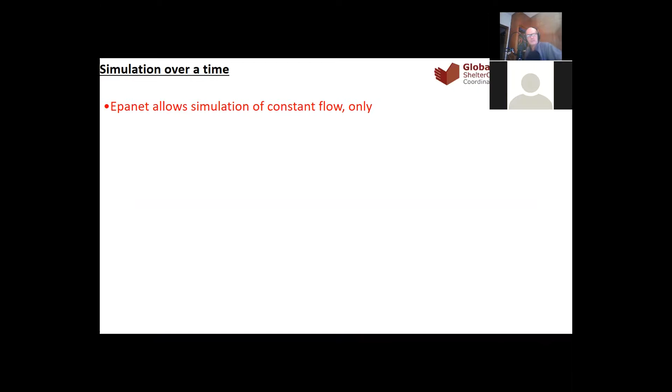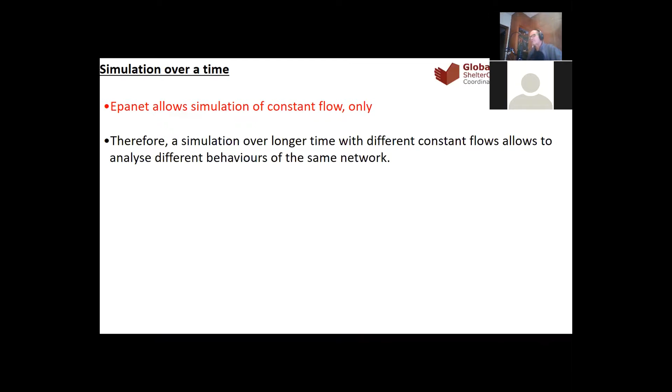Like I told you last week, Epanet allows only simulation of constant flow. That's why we make several different constant flows and we put them together. And these several different constant flows are linked to the time pattern. And it looks like that.

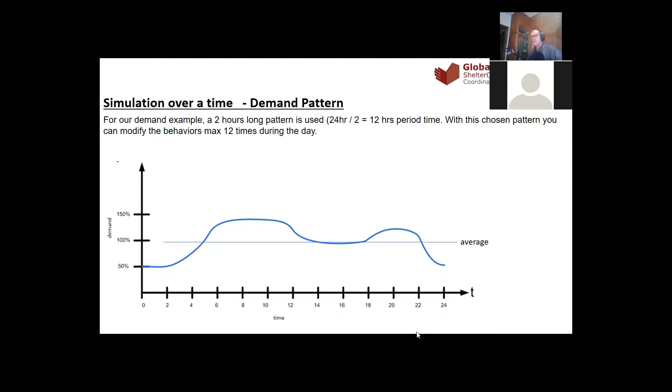Important for the demand pattern for the water consumption is that the average of the time pattern is 100%. So if we say our people use, let's say, 100 liters per day, and we know that they are consuming these 100 liters per day over one day. So a little bit, a lot in the morning, maybe a lot in the afternoon, and nothing at night or few at night. But at the very end, they use 100 liters. That's why the average of the time pattern must be 100% or 1.

So how it works, you have to open the Epanet file that we made last week, the simple analysis. The simple analysis was just in order to design the network. We ran it, it was working, and the idea is to be sure that we didn't make big mistakes like maybe forgetting pipes or writing bad elevations, but it was not a realistic simulation. Okay, now we open the Epanet file of last week, and we have to start to work on the options. We have to tell the computer that this time we do a simulation over time.

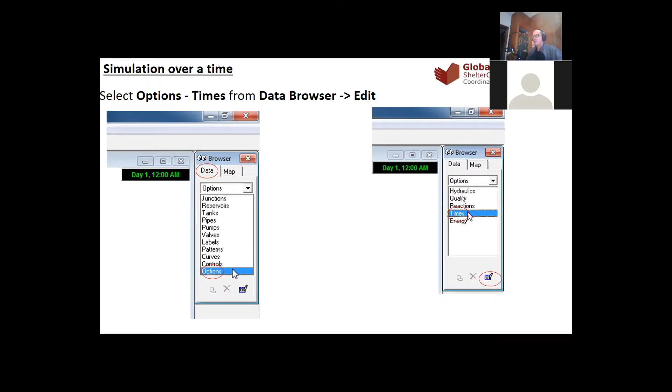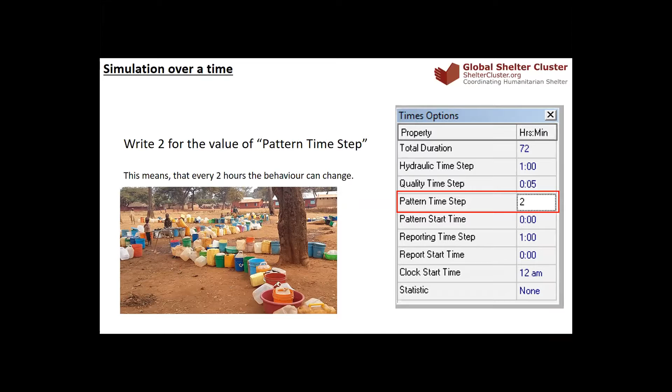For this purpose, we have to go to the browser. Under data, you go to options and you click on times, like you see here. You have this time option. You have pattern time step. Here, you have to put one number between 1 and I think 12. And this is actually the time that you consider for one change of pattern. If you write 1, it means that every hour you have to give a different pattern. If you write 2, like in this case, it means that every 2 hours you change the pattern. If you write 6, every 6 hours, and so on.

And then above, total duration, you have to give the hours for which you want to do the simulation. If you do 24 hours, it's just one day. It's better to do at least 2 days. The reason is that if you do only 1 day, you start with, let's say, a half full reservoir. Maybe you end the day with an empty reservoir, but in the morning, you start again with the half full reservoir. So it doesn't really give you a realistic simulation.

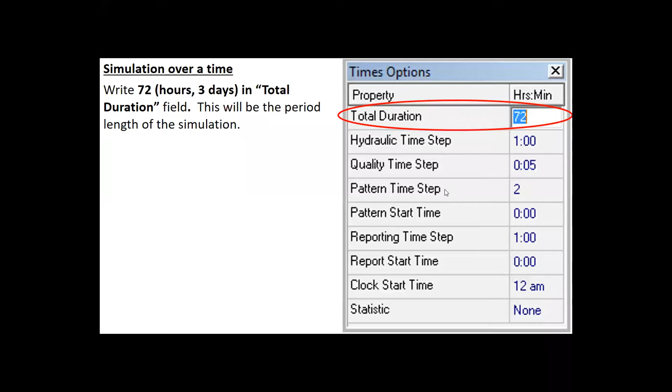That's why I like to work with 3 days at least, but you can work with 4 days. And then you can really see how the reservoir, how the system behaves over 3 days. So you use the water during 1 day, and the following morning, you continue with the situation of the previous day. That's why it's good to give more time. Then you can also give the time when you start the simulation, but it's not important. These 2 parameters, pattern time step and total duration, are the most important ones.

And then again, you have to give the pattern. In this case, like I was telling you, we have 2 types of pattern: the pattern for consumption, the demand pattern, and for the pumping time. So you go to the browser on the right, then we will see it in the exercise.

Then you choose under data a pattern, and here you will have this image here. You can see below here, you have 2 hours time pattern, because before in the option we have given number 2, and here you have the name of the pattern. We start with pattern number 1. You can put a description, for example, pattern for demand.

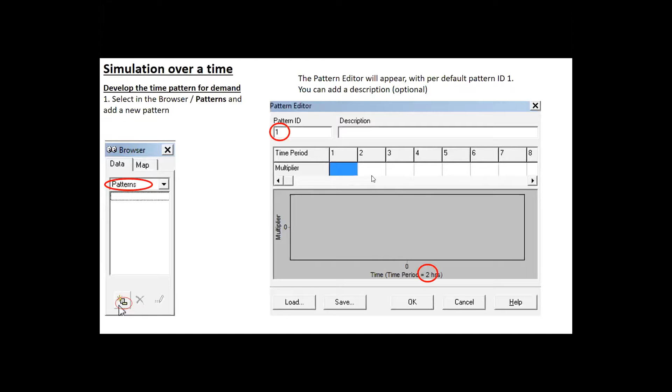You can put 0.6. Important is that, like I was telling before, the average must be 1. It means they are consuming 100 liters per day, for example, over 1 day. And this is very important. If you have a higher average, it means even if you know that the daily demand is 100 liters, but you have an average of 1.5, the system will consider 150 liters. So very important you put 1 here.

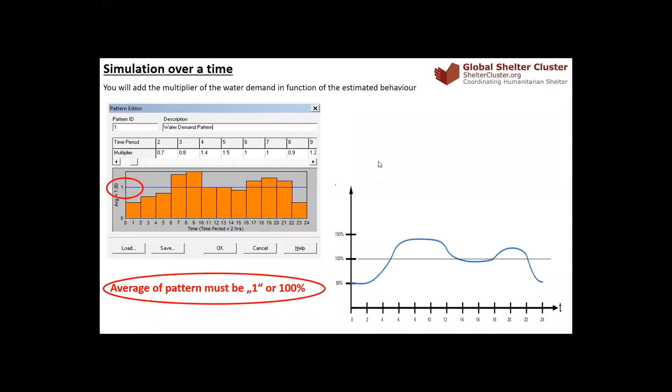You can as well save this demand for further use. And you give just the number up to 12 hours, 12 numbers, so that you will have the consumption over the 24 hours. If you would have put a time pattern of 1 hour, you should put 24 numbers here, not only 12. I think it's clear. We will see later how it works in reality. Let me put again this one.

Okay, now the issue is that you have to link each junction to the time pattern. We have some junctions with the demand, and those junctions need to be linked to the time pattern number 1. So what you do, you go on the junction, you click twice on the junction, and then you will receive these tabs here. And here under demand pattern, you have to put 1, which is actually the name of the pattern that you have just created. And this for all the junctions. You can do it automatically with bulk editing.

I just switch very quick on Epanet to show how it works. Here, you have Epanet now. You just go to edit, select all, and then you go to edit, group edit, and then you choose the junction, replace the demand pattern with 1. Doing like that, if you have many junctions, you give automatically to all the junctions the pattern 1. And of course, you can have a different pattern for different junctions. In this case, we have only one pattern because we don't have industry, but you could have a situation where you have different patterns.

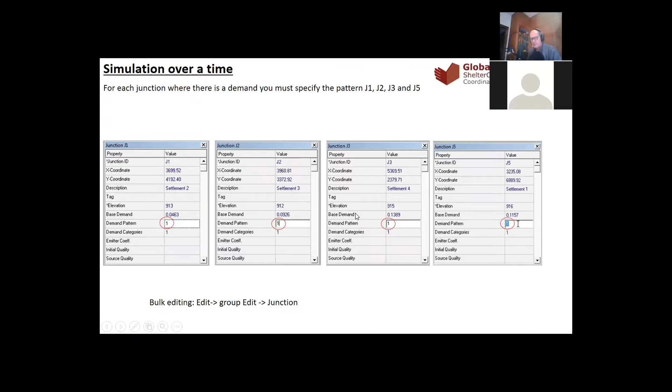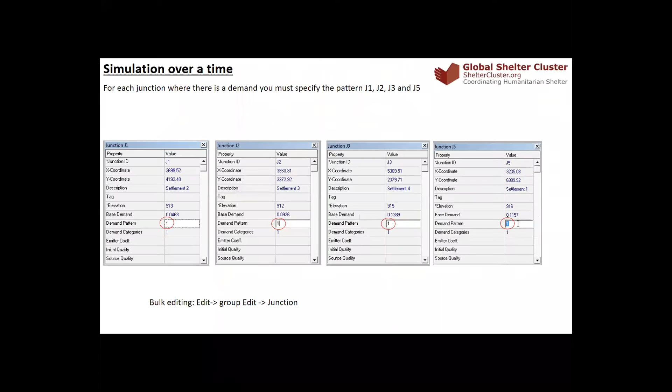Going back to my presentation. Okay. Okay, sorry, again to Epanet. Here now, if you check, let's say the junction, you will see you have demand pattern number 1. If I check junction 4, demand pattern number 1. I think it's clear. Okay, you do that for all the junctions.

And then you need to develop a second pattern, which is the pumping time. You have a type of pump that you probably have already identified. You know how many liters this pump can pump over 1 hour. You know how many liters of water you need for 1 day, and then you know how many hours the pump needs to run. The calculation is very easy. Knowing how much the pump can pump, you just have to calculate how many hours. But the idea is now to know when the pump should work.

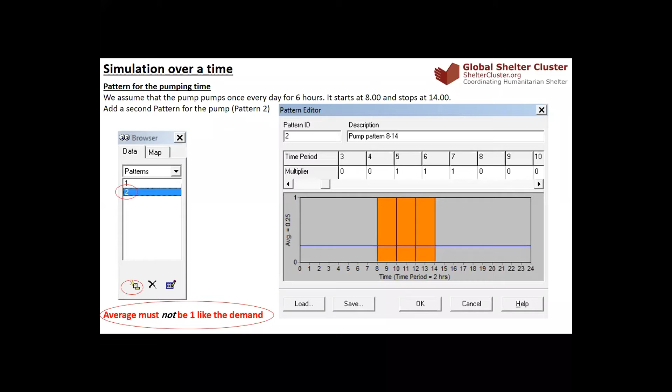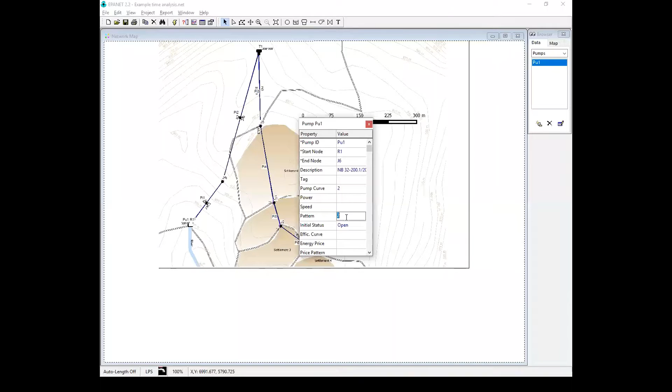Again here, now you have to link the pattern of the pump to the pump. Going back to my Epanet, I have the pump junction. I go to the pump. I click twice on my pump, and I see here pattern number 2. And this is very important. Otherwise, Epanet will not be able to link the pump to the pump pattern. Okay. Going back to my presentation.

Yes, in case you have a solar pump, the pattern is defined by the sun and by your pump. And you have to try to recreate this, let's call it natural pattern. And in this case, you have to take into account several parameters. The solar pump works, of course, with the sun, and you know there is a big difference in the solar intensity during the seasons, the summertime and the winter time.

So you need at least to do 2 patterns, one which reflects the situation during the summertime. This is because you have more water during the summertime, more pumping intensity, and you need to check your system in terms of size of piping. So with a lot of water, how will my reservoir react? How will the pipes react? How will be the speed in the pipes?

On the other hand, you also have to check the situation with the worst solarization, the worst case in the winter time, when you have little sun, because here you have to check if the pump is going to deliver enough water for the population, if the demand is going to be covered for this population. That's why it's good to have 2 types of pattern, summer situation and winter situation.

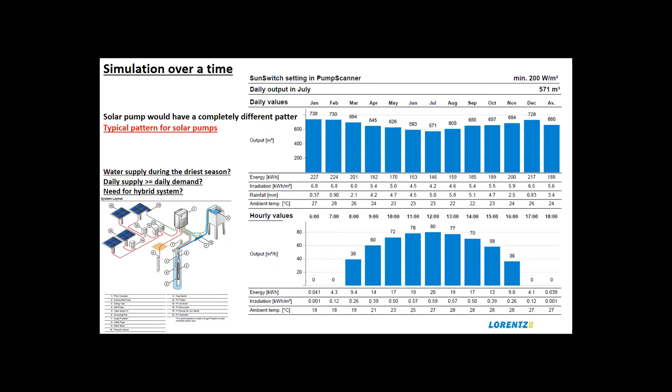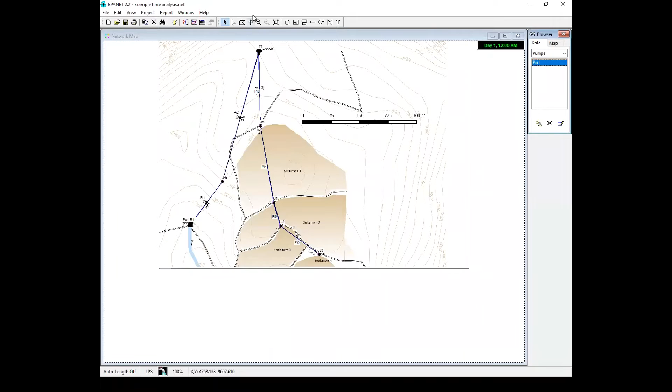First I check the situation in my reservoir. I click on the reservoir and I go to this one. Here I have graph selection. I have T1 and I choose pressure as a parameter. And now I see how the water behaves in my reservoir. You see, I start to pump in the morning at 8 o'clock for 6 hours, which is fine. And then there is a big demand and it's quickly dropping down and there is not enough water. That's why I have a problem here. And then it starts again, and like that.

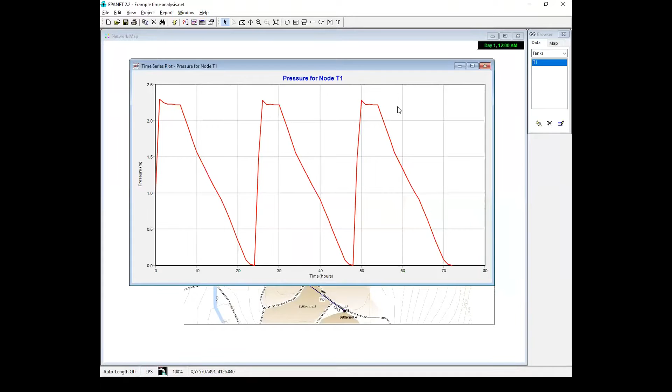But you see, somehow I have a mistake here and I have to change my parameter. What can I do? How can I improve or correct my network? I can, for example, change the pump, have a bigger pump. I can, for example, increase the size of my reservoir, but in this case it wouldn't make any change because you see the reservoir never really gets full. But what I can do is change the pumping time of my reservoir. Let's change the pumping time.

I go here, source, pump, and I check what type of pattern. Pump was pattern 2. Okay, now I change the pumping pattern number 2. It doesn't make sense. Here in this case, I was starting to pump at midnight to 6 o'clock in the morning, but it doesn't make sense to start at midnight. Let's start at 6 o'clock to 12 o'clock.

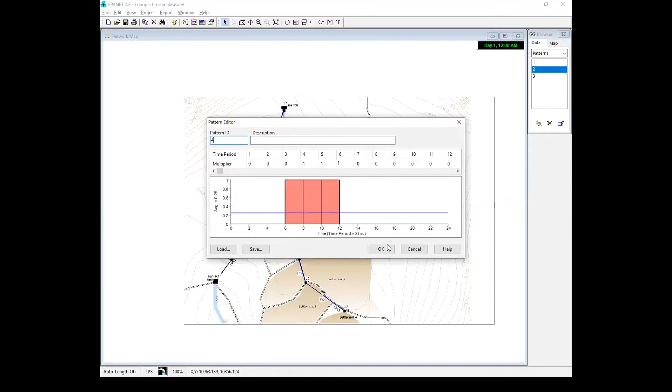Let's see what happens. So I change my parameters: 0, 0. Here I start 1, 1, 1. Now you see, it looks like I start at 6 o'clock up to 12. I change the pattern slightly. I call it pattern number 4 this time. Okay, I save it. Now I have pattern number 4.

Now again, I go to edit, select all, group edit. Sorry, mistake, it was the pump pattern. So I have to go to pump, and I give the pump pattern number 4, which is there already. Okay, fine. Now I've changed the pattern of the pump. Let's see what happens. And now it's successful. Just because before I was pumping during the night, but it makes more sense to pump over the day, during the time that people are fetching the water.

Let's see now how our reservoir behaves. Again here, pressure. Now we see it looks much better. During the night, I don't pump anymore. There is a little bit of demand. That's why the water in the reservoir goes down. Then it starts to pump at 6 o'clock. It goes up, and then it goes like that. And now it seems to be fine.

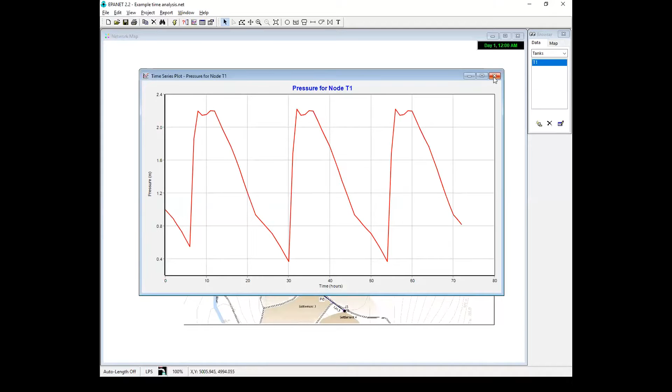I could even decrease the size of the reservoir a little bit if I wanted, because the elevation or the height of the reservoir is 2.2 meters more or less. So I would even save some money, but maybe it's not important to do that. But now we have to check different things as well. I want to see what type of pressure I have in my junctions. Let's go back to the presentation.

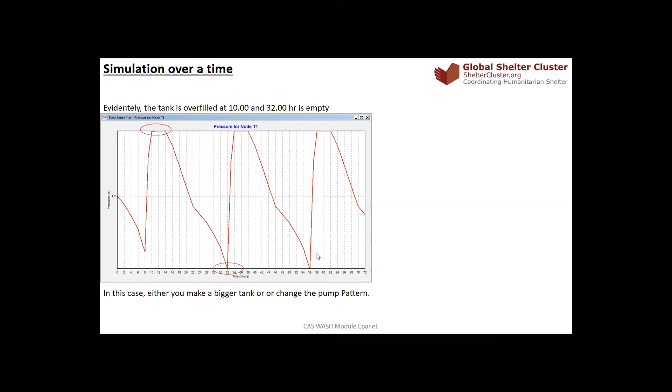Where is it? Okay, here. So before, in the previous case, it was not only that the reservoir was empty, but it was overfilled because the reservoir was only 2 meters high. So that's why you can improve the situation by changing the pattern or even changing the size of the reservoir. Okay.

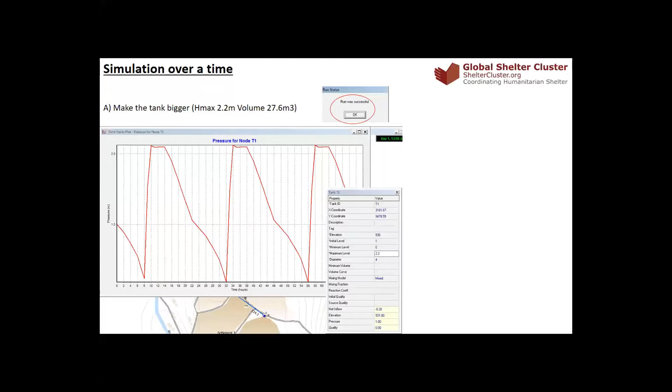This is also a possible pattern that you could think of. You could even think of pumping a little bit in the morning or a little bit in the afternoon. It's up to you. You have to find the optimum in terms of size of the reservoir, but not only, but as well in terms of working time. Maybe it's more convenient for you to have an assistant to pump 2 hours in the morning, or 3 hours in the morning and 3 hours in the afternoon. This is up to you, but Epanet will give you the opportunity to make all these changes.

And again, I want to repeat that for every change that you do, you have to save the change so that you keep a record of all the changes. And at the end, you can really decide what is the best solution for your network.

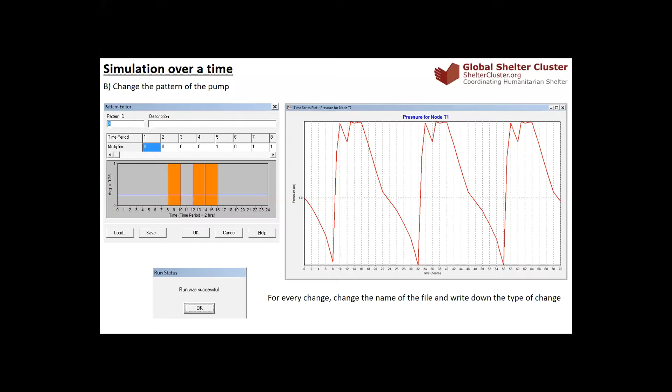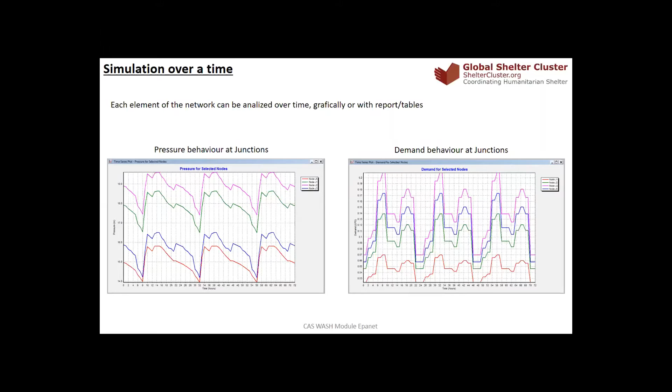But now we also have to see how the pipes react, but especially how the junctions react. We want to ensure that every junction has enough pressure. What does it mean? If you have a tap stand, you should have at least 1 meter pressure. But if you have a house connection, depending on the type of the houses, you need much more pressure, up to 10 meters. And maybe you have even too much pressure. In that case, you have to find a solution to decrease the pressure. I was telling you, valves are not a good solution, but now let's go back to our live Epanet.

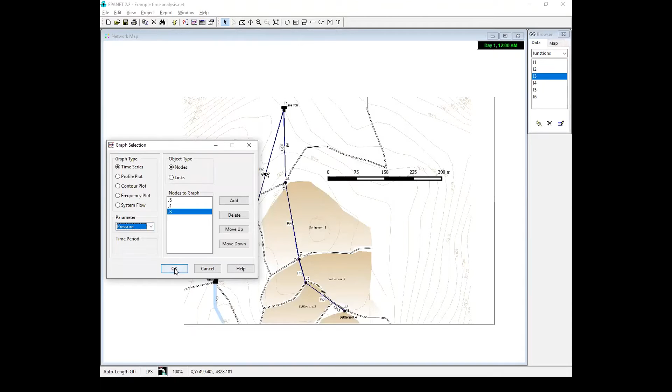It's here. To see the pressure on the junction, just click on the junction and go again on the graph. Why is it not? Okay, here. You can even add other junctions. I have junction 5 already here. This junction, I add it. And this junction I added. Now I have 3 junctions added to my graph selection. Again, I want to see the pressure and I click OK. Now I see how the pressure of the junctions behaves over the day.

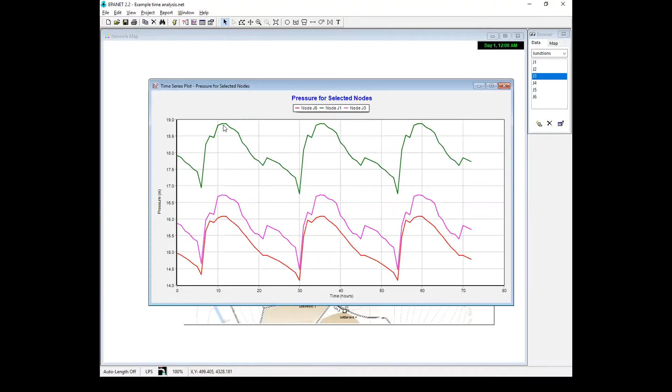You see, those 2 junctions go up to 16 meters, which is a good pressure, but it's not too high. This goes up to 19 meters, probably still good. It's probably not too high, but it's fine. You see that everywhere, in this case, you have enough pressure. If the pressure were negative, the system would give you an error. And if the pressure is almost 0, then you have to be very, very careful, because a small change in the demand or the pumping could give you negative pressure, and this will mean no water in the pipe. And not having water in the pipe is not a good solution.

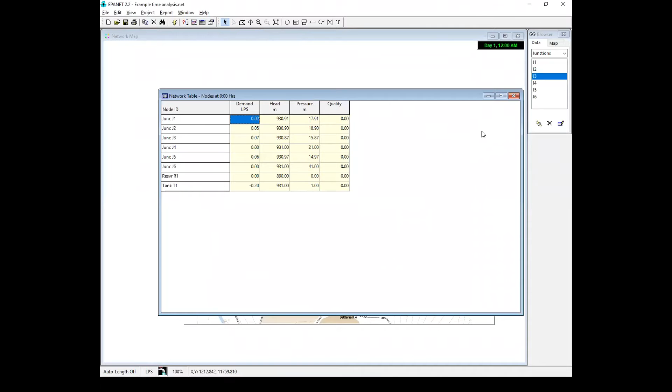And then you can also have a report. Here you can have the report table, column type, okay. You can see here a table report of all the junctions and the pressure that you have at one specific time. Again, report table, you give the time, let's say I want to see the situation at 12 o'clock. And you see the situation at 12 o'clock. This helps you a little bit to understand the situation of your network.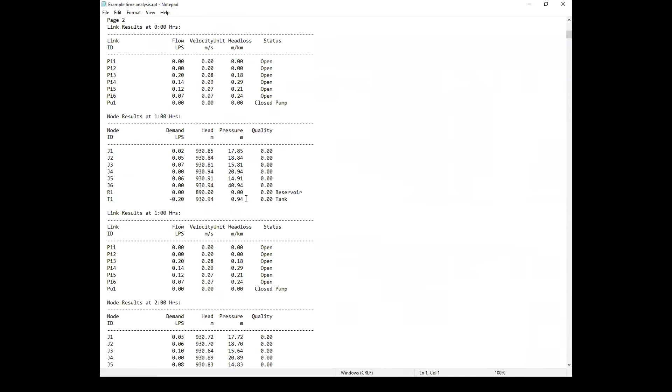You can also have a full report with everything, and this is going to be a text document that you can save, then open and have a look. In this report, you will have all the data that you can analyze. You can have the flows of the pipes, the length of the pipes, everything is there. This can be interesting as well.

You can also check on the map the behavior of your network. You go to the browser, you want to see the behavior over time of the junctions in terms of pressure. You look, and then you want to see the behavior of the pipes in terms of velocity of the water, for example. And then you see here a tape recorder style. You can start the simulation, and you see the colors are going to change over time.

You see here the time is running and the different colors, and then you have the legend here, and you really see the flow and the size of the pipe. If you have too high a velocity, you might eventually increase the pipe. If you have a very high pressure, you will have a blue dot here. You might put the reservoir a little bit lower.

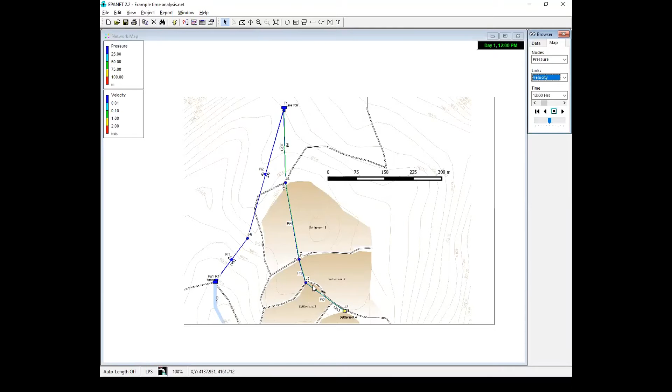That will also save pipe length. But this also helps you to understand how your network behaves over time. And the simulation works over 3 days. We can run it, you can stop it, of course, and check all the details for every segment. And of course, all these elements can be exported and put in a report.

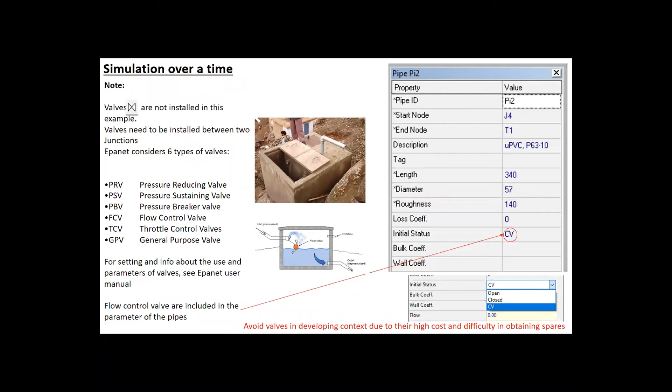The water is coming in and just destroys all the energy through this, let's say, chamber, and then you really can decrease a lot of pressure on the pipes. And another valve that is always there in the system is the control valves in the pipes. When you have it open, it means the water in the pipe can run in both directions. When you have CV, like in the picture, it's only in one direction. This might be interesting to put on the pipe after a pump, for example. If you keep it open, of course, it's clear. If you put it closed, the system will not work at all. So that's a reminder about the valves.

And that's actually all about the time analysis. Once it is done, it's very easy to check it, to understand. The difficult part of it is really the part that we discussed last week when you have to develop the workshop. Now I give you some time. If you have some questions, it's time to ask. Otherwise, I will take another 10 minutes just to give you an idea about the problem of the elevation. Please intervene if you have questions anytime, just interrupt me.

Like you have seen, the elevation is a problem because we normally don't have a total station, we don't have precise elevation. That's why I want to show you some ideas about how to find the elevation. There are several ways to find the elevation. You might use a GPS device or your phone. You might use topographic maps, online tools, a digital elevation model, and drone or total station.

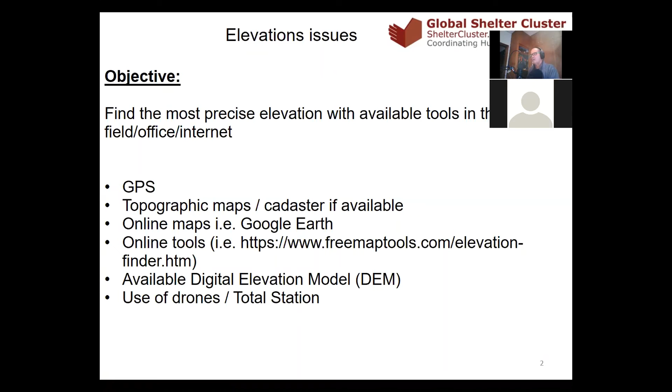Let's start with the GPS. I don't know how many of you are using the GPS. GPS is very good in terms of location, it's precise on the horizontal location, but for the elevation it's really not a good tool. You might have up to 20-meter difference, and the elevation of the GPS also depends on the atmospheric pressure that changes over the day. So try to avoid using the GPS. If you have to use the GPS for any reason, try to take the elevations quickly during the same day, so at least you don't have a big difference in the pressure that influences your elevation. And try to calibrate the instrument before starting to record the elevation, but avoid the GPS.

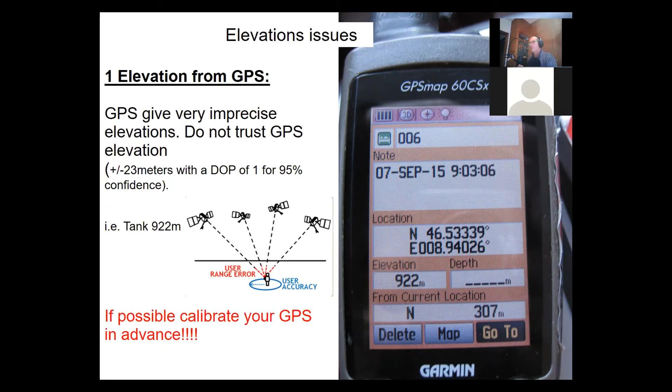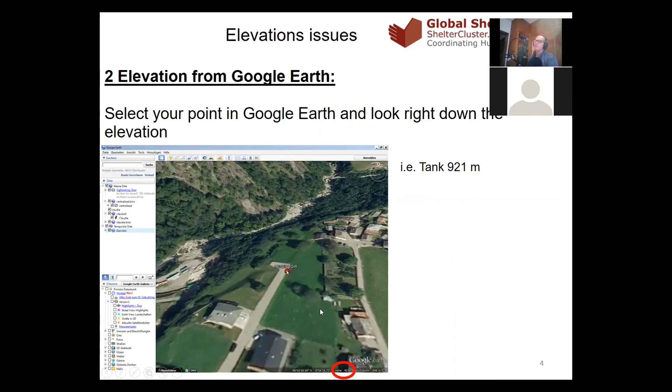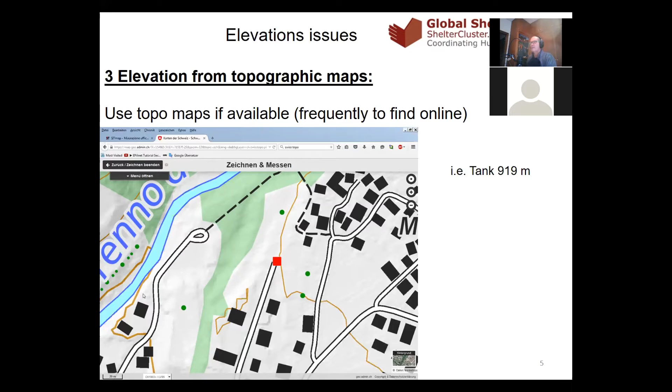Then you have Google Earth. Google Earth is fine somehow. The simple way, you just put the point of your location on Google Earth, and below on the right, you will have the elevation. It's fine, but also not that precise. In some countries, like Switzerland, you will find good topographic maps. I have no idea about Syria, how good they are, but if they exist, please find them and extract the elevation from the topographic maps. In some countries, you even have the Cadastre available online, like in Switzerland. That's actually the best one because Cadastres are very precise. In my country, I have no idea about Syria. And forget about Africa, you don't have a precise Cadastre.

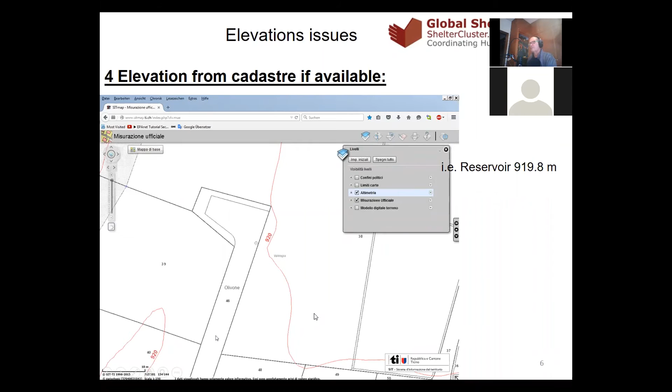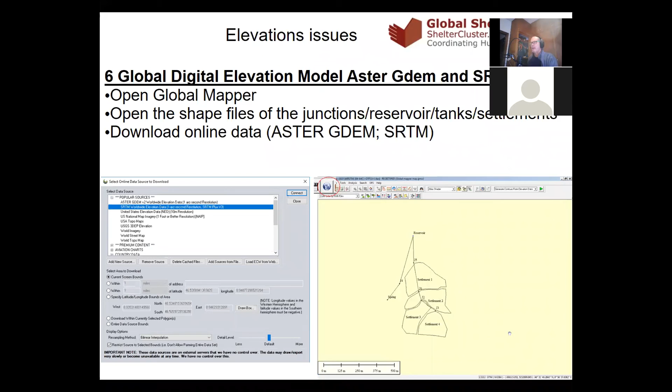That's a good tool. The link is in the chat, and the link will also be on the YouTube channel as well. The only problem is that you need the precise coordinate, but this you can probably find. That's a good tool, I like it. And then, of course, you have Global Mapper that we have seen in the previous workshop.

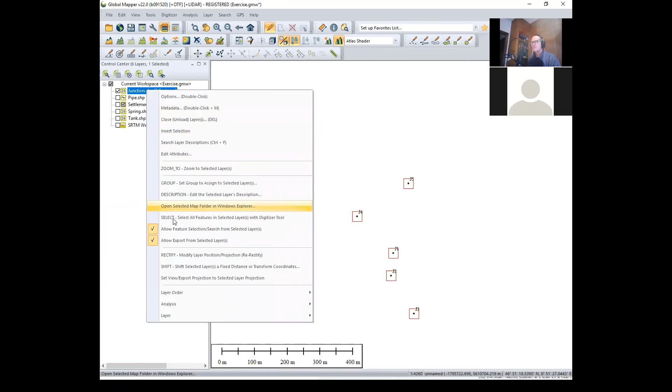If you take our exercise here, that's our small network. Let's take away Google Earth. Okay, I just show only the junction here. You select the junction, and then you download through the download icon the digital elevation model. You go over the junction, you right click on it, analysis, apply elevation.

And now all the junctions, all those points got the elevation. You can check with the information tool, you click on that and you see the elevation here. You see all the elevation, but be careful that this elevation is the terrain elevation. And then you have to consider that you have a 1 meter tap stand, or maybe you have a 10-meter building that you have to connect. So this is the ground elevation, but automatically you have all the elevation.

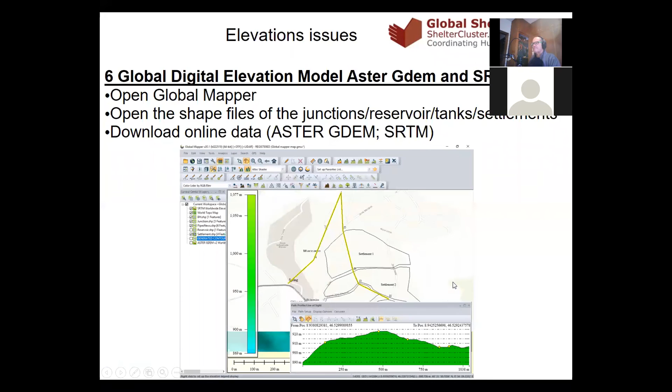And then additionally with Global Mapper, it's interesting that you can also look at the section of the pipe, and this is important. You select the pipe, you right click on the pipe, and you can see the profile of the pipe, this one, or maybe even all together, analyze pipe profile. Then you see here the profile of your pipe. This is very important because, for example, here you have a high point, and you might identify the location where you can put an air valve, or a purge valve for cleaning the pipe.